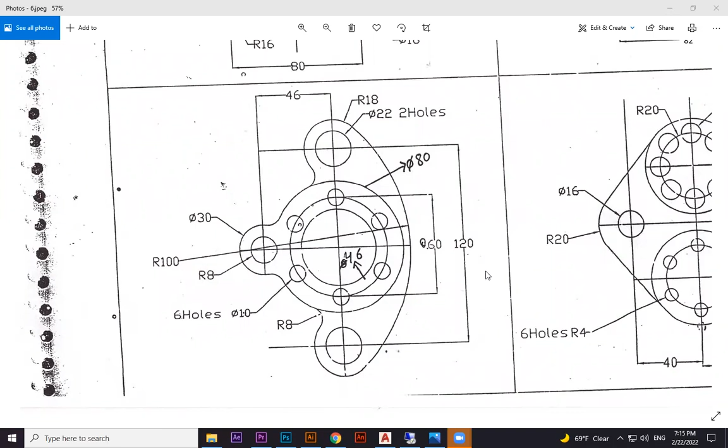We have lots of other similar mechanical drawings also. So now we're going to do this exercise. Always remember, in each exercise I'm going to introduce different tools, sometimes new options. For example, in this one I'm going to teach you two new options, called tan tan radius and fillet. So similarly, each drawing will have new options.

Later we'll show you something to do for exercise, so you can practice that exercise also. If there is nothing new in that option, we'll keep it in the comment box as an exercise to practice. So we're going to start this one. Before starting, always remember, you need to type UNITS and check your units. If it is in inches, decimal, you keep it. Precision value 1 is enough.

Inches or centimeters, you decide. Usually mechanical drawings are done in inches. If you want to keep it in centimeters, it's okay. Now I'm considering this one in centimeters. Before drawing any mechanical drawing, these lines are called reference lines. So I'm going to fix a reference line over here.

So we have XL, we already discussed in the previous lessons. XL, and switch on your ortho. Space bar repeats the last command, otherwise you need to type XL again. Now we got it. Why do we make reference lines? Because we don't know the size. It's an endless line, so whether bigger or smaller, we can consider this our reference line. So we start from the center. It's better, the center is given.

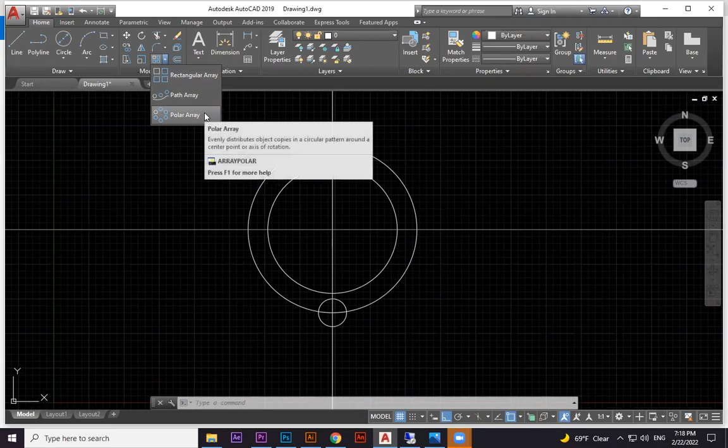So how can we do it? We do polar array, we already discussed it. Click on polar array, select it, enter, click on the midpoint, and put the number over here. It's already 6, that's why I just hit enter and escape. Now the outside is given as 80 diameter. I'm taking diameter, that's why I'm just pressing 80. We did this one now.

Now we need to go to this portion and this portion. The total from here to here is 120, so we assume this is the middle. If not, there would be separate measurements here and here. It is not given like that, so we can assume it's half. So we take a 60 offset from the center up and a 60 offset down. Select offset, shortcut is O. Enter 60, enter. Click on this line, move up. Click on this line, move down.

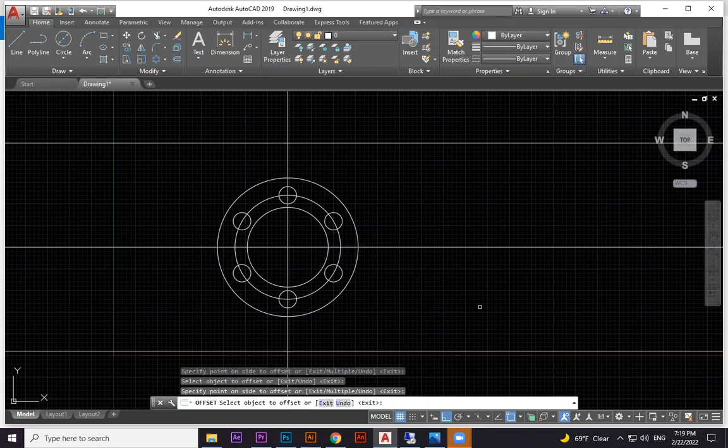Now there is a small circle given as 22 diameter, 2 hole. 2 hole means one here and one here. So circle, diameter, 22. I'm not using copy now, so here also I'm going to draw 22. From the next drawing onwards, we can start to use copy. This is 18 radius, so here we can consider 18.

That's 18 radius. So you need to choose radius, 18, and here also 18.

Now, this is a new option, so for time being I'm going to keep it. We'll discuss it last. Even this one we don't know, but we can do this portion. So to go from here to here to understand the center, 46 is the offset from here to here, 46. So we take offset O, enter, 46, enter from here to here.

Small circle is 8, big circle is 30 diameter. So here is 8 first, and we have 30 diameter. It's okay that let it touch over there. You think it's a mistake, but actually not, because it's going to trim later. We have done that, almost looking good now.

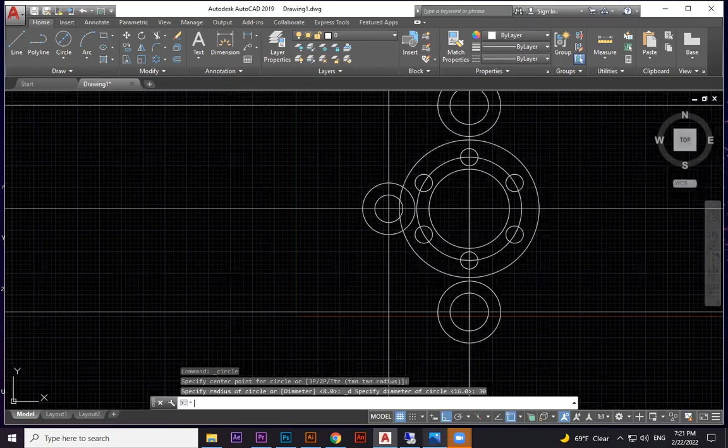So only we have to do these 4 arcs, and this circle. Actually, for this circle, we have to use maybe another circle here somewhere, but we don't know from where it is, that's our problem. Maybe from here it can touch over there, but how can we know where exactly it is? We don't know, right? Even if it is from here, of course it's not touching.

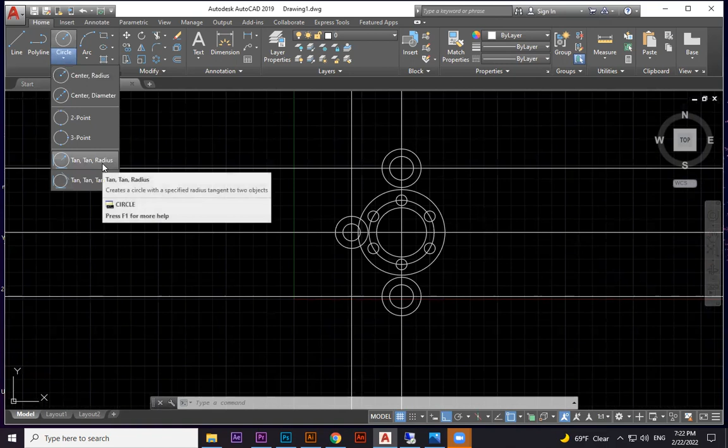So there is a logic for it. Between two circles, parallelly, if you want to connect another circle, the option is called tan tan radius. Between two circles, parallel, if you want to connect them, we call it tangent. I hope we have done a previous exercise like that. So here between two circles you need to do tan, then you can get the connection from here to here. So I'm going to choose this tan radius.

The execution of tan radius is a little bit different, so listen carefully here, don't make a mistake. Tan radius, first I'm taking: specify the point on objects for the first tangent. So the first tangent, approximately we know here, we should know approximately where it is touching.

Don't try to select over here, because we only know approximately here; exactly we don't know where it is. So click somewhere over here. Then it is telling select the second, here somewhere over here. Then it is telling specify the radius. How much is the radius given? It is given as 100. So I'm just typing 100, enter.

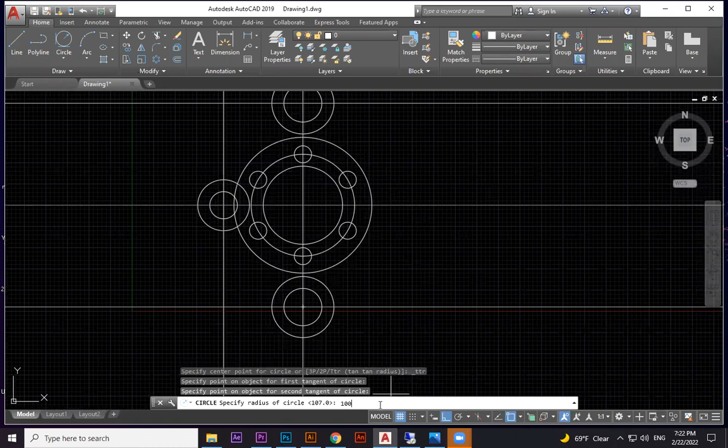Now you can see it exactly snapped here and there. I'll show you one more time: take tan radius, click one side, click other side, enter the value. Value is 100. Then take trim tool, enter to execute it. Cut here and here only, and the remaining you can select and delete. So tan we got it.

And the other option, there's a small shape that will come like this kind of arc. This is called fillet option. Fillet is here. Now how much is the fillet given? 8. So here it's not given, so we can assume it's the same thing. In mechanical drawing, if it's not given similarly, you can assume the same value, otherwise it will be mentioned. So this is radius 8. So I'm going to choose this fillet.

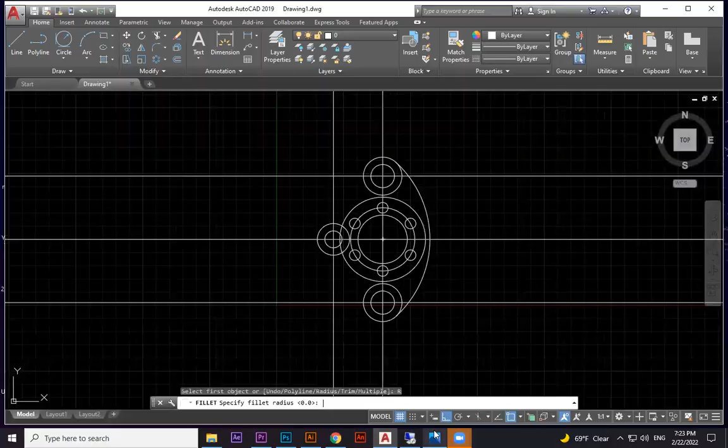See how we're going to do fillet. Select fillet, right click, radius. How much was it? 8. Yeah, so 8, enter. Click here, then click here, automatically it will come. One more time: fillet, right click radius, 8, enter, here to here, fillet.

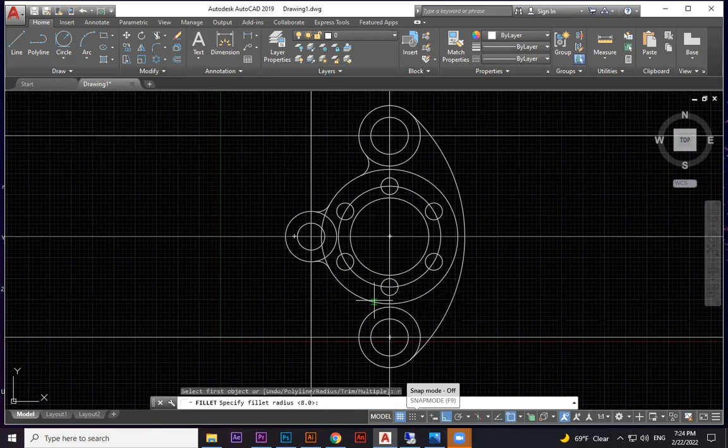Instead of right click radius, you can click over here also, then 8, here to here, fillet. Or you can press R from here, because R is in blue letter, blue color, so this is also possible. 8, here to here, done.

Now all these are reference lines. You can select this one, delete. Don't try to trim it, because you need to do one by one, but when you're selecting all and deleting, it's fine.

Now you see here is a mistake—not mistake, here we need to trim something. So what we're going to do: trim tool. TR is the shortcut, trim. In AutoCAD, most shortcuts use the first letter or second letter.

Cut here. How to do it one more time? Trim, take from here, or TR, enter. Then you need to press one more time, enter, okay? Or if you're choosing from here, then you need to press only one time, enter. Because when you're using the shortcut TR, enter means to execute that command. Again, enter to cut any intersection from here at a time.

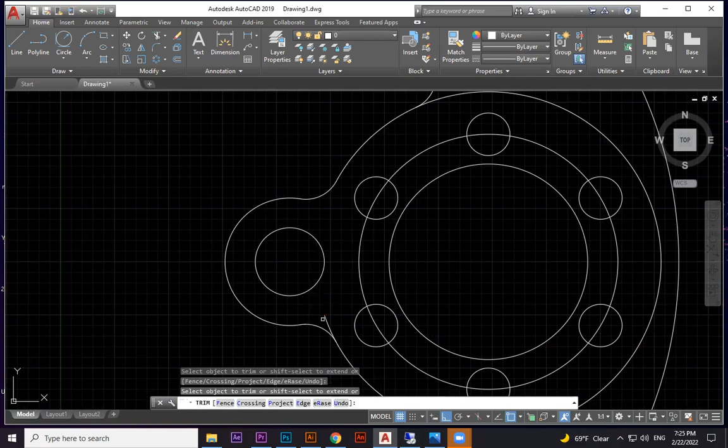So go follow this way one by one, then nothing extra will happen. This will happen sometimes when you trim like this—sometimes after trim if you do it, this can occur. If that happens, you have to draw the circle again. Actually this is a reference; this is our final result, and this was our drawing.

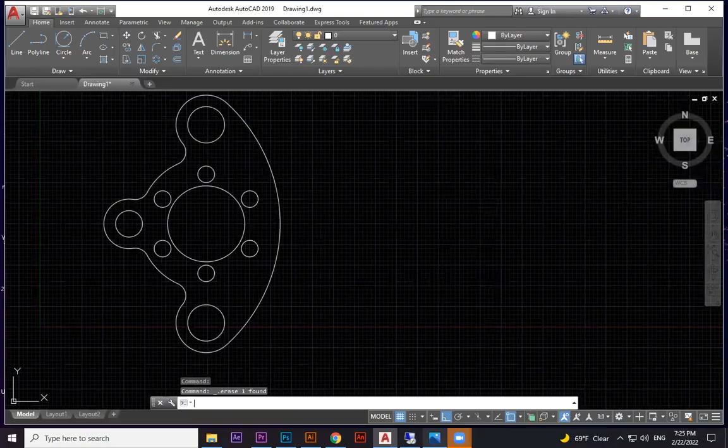Hope you understood. You need to practice the same exercise 2 or 3 times, because we studied 2 new options here: one is tan radius and one is fillet option.